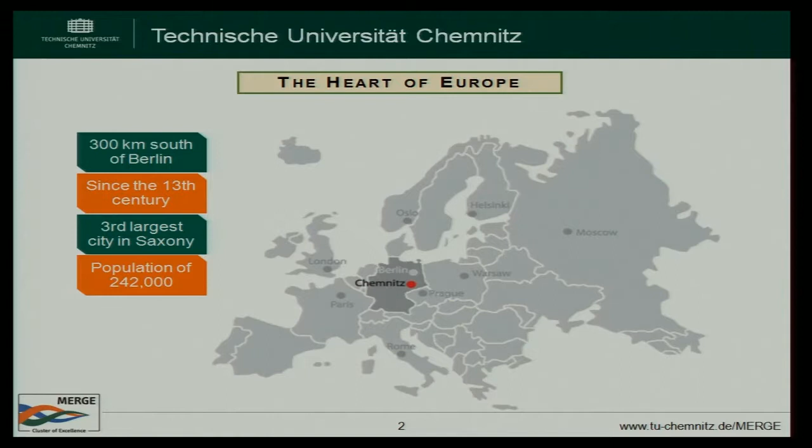In the university we have excellent research in a lot of topics, but especially as it is a technical university, we are focused on the faculties of mechanical engineering, electrical engineering, and natural science. These faculties, with some others like mathematics and economics, all carry out the research in our cluster of excellence on merged technologies for multifunctional lightweight structures.

So this is a big issue. If you want to create lightweight structures, or fiber-reinforced plastics as one special case, it's an interdisciplinary subject. You cannot solve the problems alone as a normal mechanical engineer. You need a lot of other scientific input. You need engineers, you need mathematics for calculation, you need chemistry, especially polymer chemists for, let's say, optimizing of fiber-matrix adhesion, for example.

And so, to solve all this, you need a strong cooperation within the university, but also with cooperation partners, because for us at the university it's really important to have the feedback of industry, to know what they need, what is necessary to develop application parts for lightweight structures.

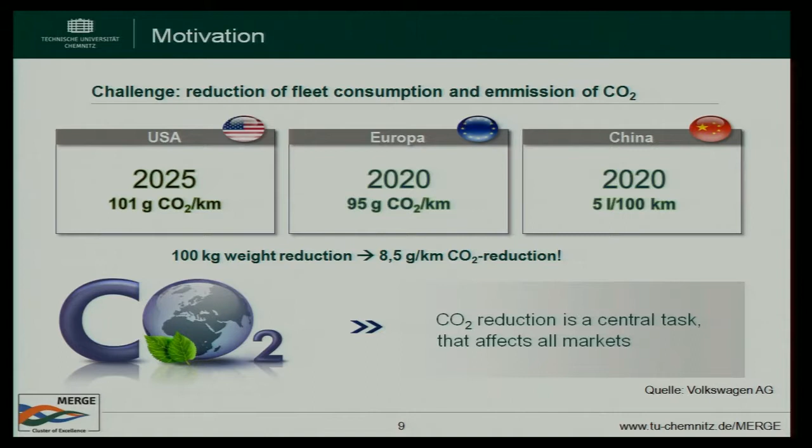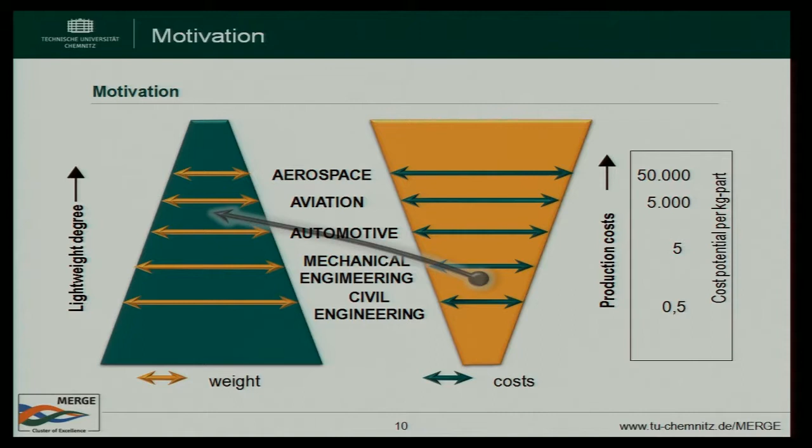And the problem is, making lightweight structures is state of the art for aerospace, for aircraft, for rockets, and so on. But this is really expensive. No one wants to pay $1 million for a car. So for mass production, you need technologies which enable this lightweight construction, and therefore you cannot use classical production technologies for making high-performance fiber reinforced plastics like hand lamination or resin transfer molding to make thermoset-based carbon fiber reinforced parts.

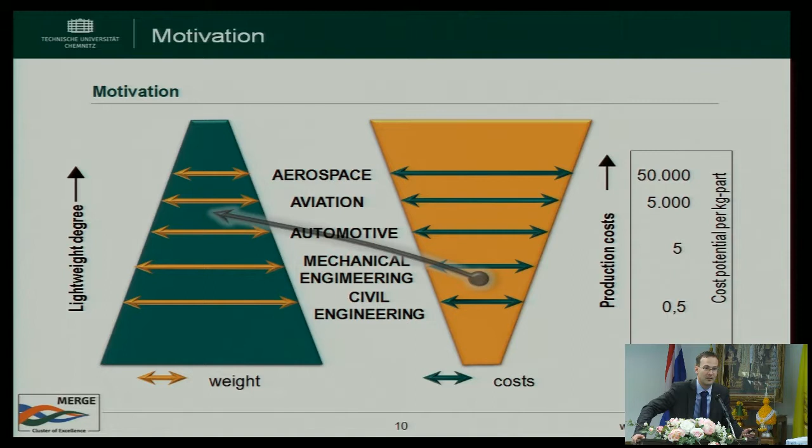You need technologies especially for thermoplastics like injection molding, press molding, technologies which are suitable for mass production, to produce more or less 1,000 cars per day, which is, for example, a typical production rate for big automobile producers like Toyota or Volkswagen and so on. So this is one aim we also have in the cluster.

On the one side, we want to reduce the weight of the structures, so we are efficient during the lifetime, but we also need efficient technologies for producing these lightweight structures. So we have to look at two major goals: during lifetime, reduction of emission, to be more efficient. This is something natural if you have lightweight structures, and on the other side we need efficient technologies.

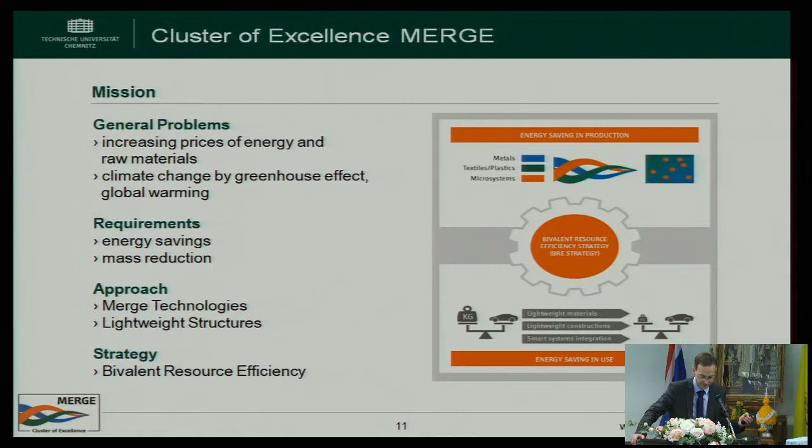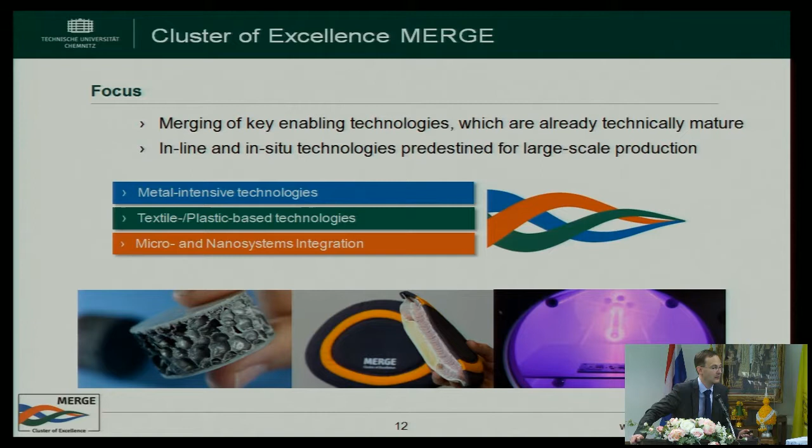So what we are looking at especially is using metal intensive technologies which are based on state-of-the-art technology, like sheet forming, die casting, or for example high pressure forming. And we are looking at textile plastic based technologies, so this is typical fiber reinforced plastics technologies, injection molding for example, and also looking at the integration of micro nano systems in the structures.

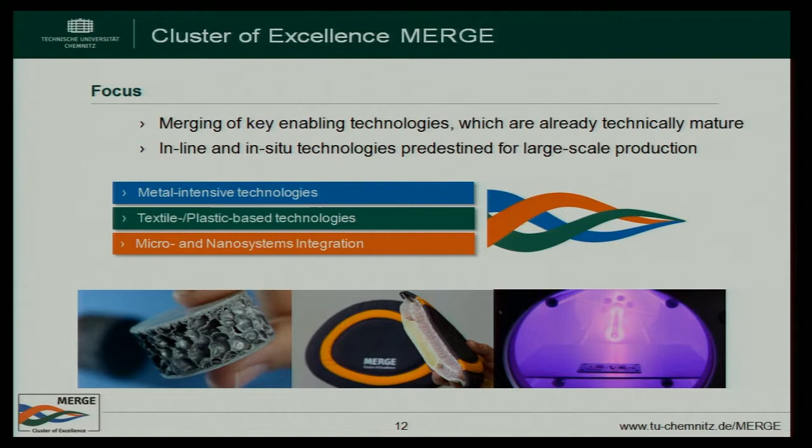So today the world is getting smarter. It means all your structures, not only in cars but also applications in civil engineering, medicine. You integrate sensors, sometimes also already actuators in the structures, and therefore if you integrate it with technologies efficiently in the parts, you also can save material. You can be lighter because you don't need additional fasteners for mounting it, and it can be efficient because you don't need additional processing steps. So all these three we are looking at to reach the goal of making lightweight structures.

And from the technology view, we are looking at technologies in making semi-finished products, prepregs, in technologies which are roll-to-roll, meaning continuous working technologies coming from a roll like a textile. You make something continuous working, functionalization, fiber orientation, impregnation with the matrix, going again on a roll. So this is continuous working. It's not a sequence with some

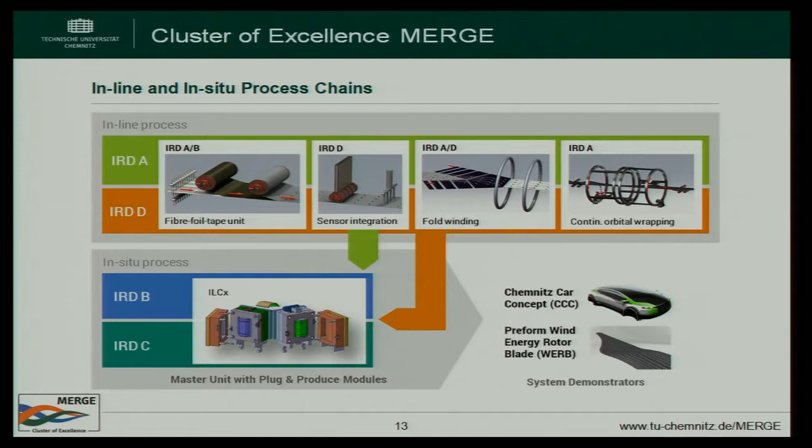stops between, and then try to go into so-called in situ processes, in mold processes, which means you have a mold where you bring all your components together, and you can use this mold for many parts. Close it, make a part, open it, demold, close it, make a part, open it, demold, and so on, with short cycle times, something between 1 minute, 2 minutes, but not longer.

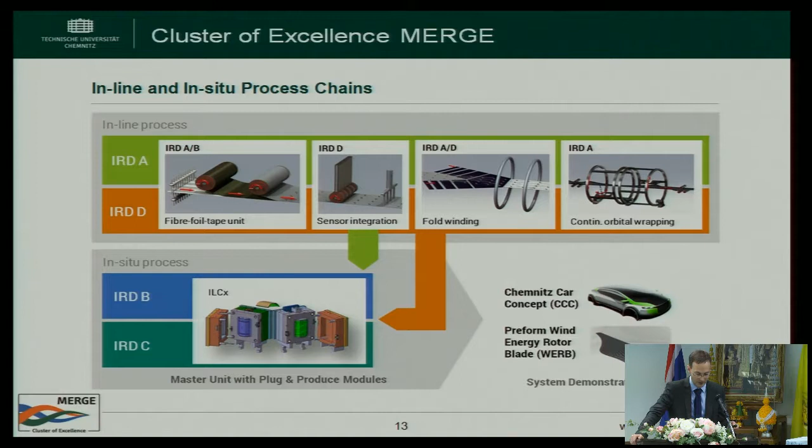Okay, so to start, how to get something like this solved? We are starting with some basics, how we came from the specifications we get from the industry. You have some supplier who makes some parts for an automotive company, and he wants to reduce the weight of some parts because he gets these conditions from the automobile company. Normally, some of the automobile companies say, okay, our next generation car must be 200 kilograms lighter in total, and this you have to go to every development area. Under the hood, interior, exterior, everywhere you have to reduce a percentage of weight to reach this total amount of, let's say, 200 kilograms for the next generation car.

And so you get some boundary conditions, and how to solve this problem. You have to look at the specifications you need, at the design, how to design something with fiber reinforced plastics, and then go from this design to making the mold and making the technology. And this we want to look at in the next, let's say, 1 hour. I have to look a little bit at the timetable. So we have some time to go step by step, and for example, I have a part with me where we can look how to develop it step by step.

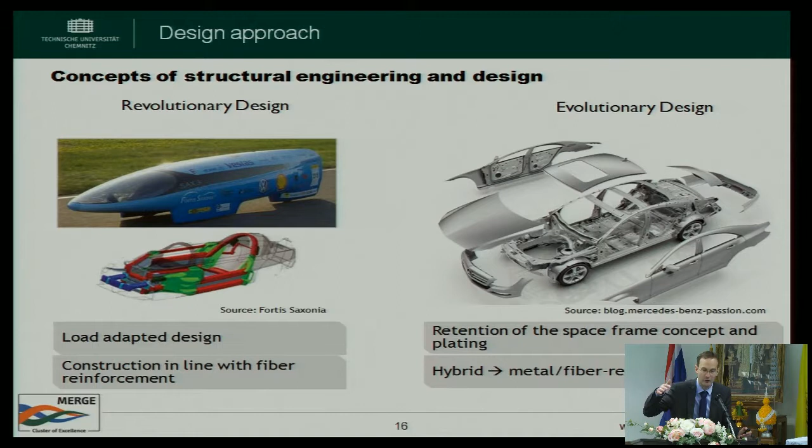So in the revolutionary design, you have the possibility to make some topology optimized construction, a construction with, let's say, stiffeners, ribs, profiles made from carbon fiber reinforced plastics. The load transfer is only here, so you really have material only where you need it. And it's fiber-friendly load transfer, so the load goes only in fiber direction.

In the evolutionary design, as you can see here, for example, with such a pillar for the roof reinforcement, you change single components and make them, let's say, from fibers at the end. For the assembly, you have some steel parts, and you have to assemble it with the normal steel car body.

And you step by step change some parts, and then you need, of course, assembly technologies, fasteners or gluing or welding, something like this, where you can join the fiber-reinforced plastic parts with the normal steel. So that's not so easy, especially if you use carbon fibers. You have problems with corrosion if you have direct contact between carbon fibers and, let's say, steel or aluminum.

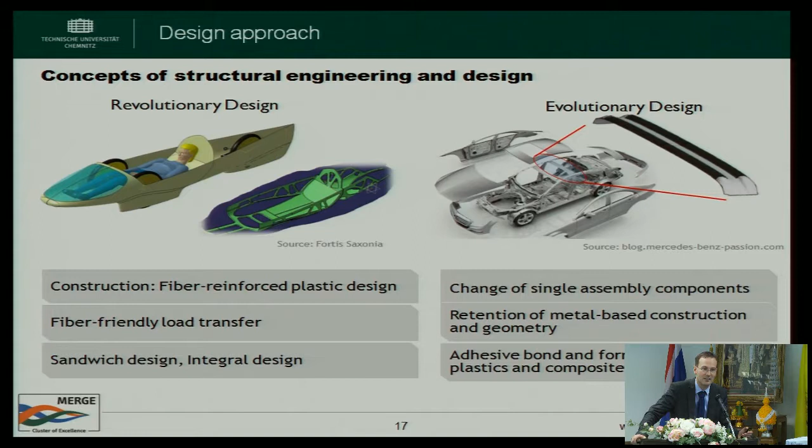So you have to look at quite interesting joining techniques. Sascha Müller, for example, will discuss some joining techniques later on, how to solve such problems.

Now, the next is the design approach, how to reach lightweight design. You have more or less 3 major topics to reduce the weight. The first, I think the easiest to understand, is using lightweight materials. Per definition, lightweight is something with a density below, let's say, 5 grams per cubic centimeter. So per definition, aluminum is a lightweight material, titanium is a lightweight material, magnesium is a lightweight material, but also, of course, plastics and fiber-reinforced plastics.

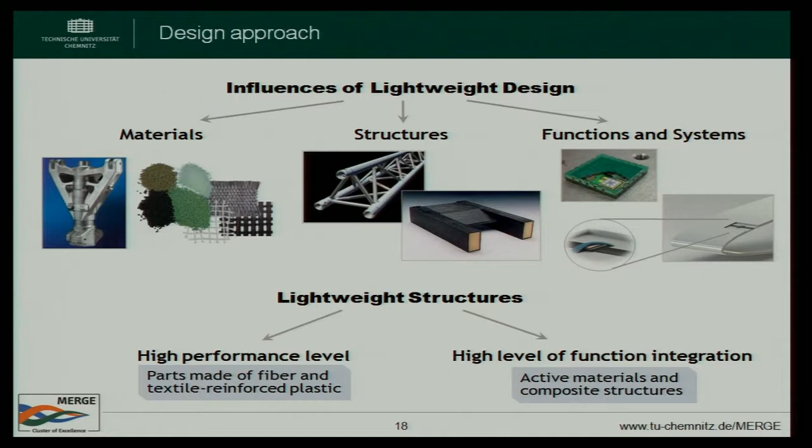Because the density is below 5 grams per cubic centimeter. With normal plastics we are around 1, depending on whether it floats on water or not, so this is easy to check. A glass fiber has a density of, let's say, 2.7, so in combination with plastics we are at a density of, let's say, 1.4, 1.5 grams per cubic centimeter. So this is something easy to understand.

But of course, you can also make lightweight design with a steel construction, let's say a bridge construction. Steel with a density of 7 is not a lightweight material, but with the construction, for example rib structures or sandwich structures, you can reach lightweight design, you can reduce the weight only with the design.

So, for example, Dr. Sandra Gelbrich will speak tomorrow also on fiber-reinforced concrete. So this is something you can also construct with concrete in a lightweight design. So this is the topic of construction.

And last but not least, you can reach lightweight design by integrating functions into one part which you made before with separate parts, for example, having some kinematics. You have some fiber-reinforced plastic, and you want, for example, a seat in a car that moves in height or for your back to reach some position.

You can reach it with some additional mounting parts like an electric motor, you need some electric devices, but with some tricky design of fiber-reinforced plastics, you can reach this goal also without an electricity part, without a motor, without an electric drive, and so you can reduce the weight. Because in all electric applications you have copper, which is really heavy material, you have steel inside, so you can reduce the weight. Also, if you have some sensors integrated, you can avoid some devices for switch on, switch off. You can reduce also the weight and so on.

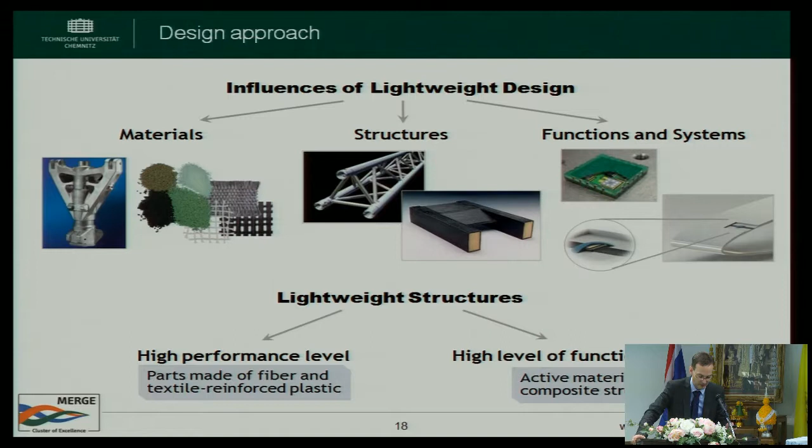So on this we are looking at materials, structures and integration of function and systems to reach a lightweight design. And for today in all the system, we are concentrating at the moment on lightweight materials, on fiber-reinforced plastics, for the next 2 days.

Having this in mind, lightweight is not only made with fiber reinforced plastics, it's a quite interesting part, but you also can deal with lightweight metals and so on. And in this combination, together with lightweight structures, we call it lightweight systems. There we can really reach a goal of reduced weight, let's say 20-30%, using lightweight materials, and with a really tough and smart design to get lightweight also in the application.

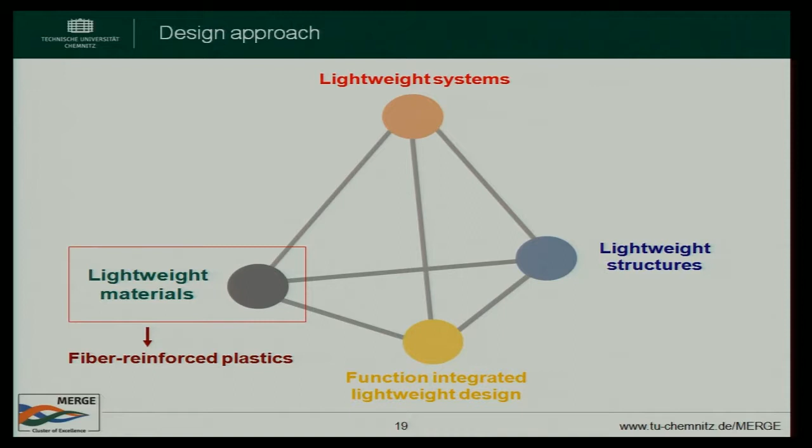Now, lightweight, to reduce the weight, this is not something you can get cheap. It needs some efforts in using materials, new technologies, and also, of course, in engineering costs. Because, well, design with metal, it's also tricky, but it's even more tricky to engineer fiber reinforced plastics, because the material behavior is not isotropic, it's anisotropic. So you have different material properties in different directions because of the fiber orientation.

Of course, when you can save weight, more or less you can also reduce your raw material cost if you don't need so much material, but your specific material costs will rapidly increase because carbon fibers are much more expensive, let's say, compared to steel. So in total, also your manufacturing costs will increase because you need new technologies. Total costs will rapidly increase when you want to increase the lightweight degree.

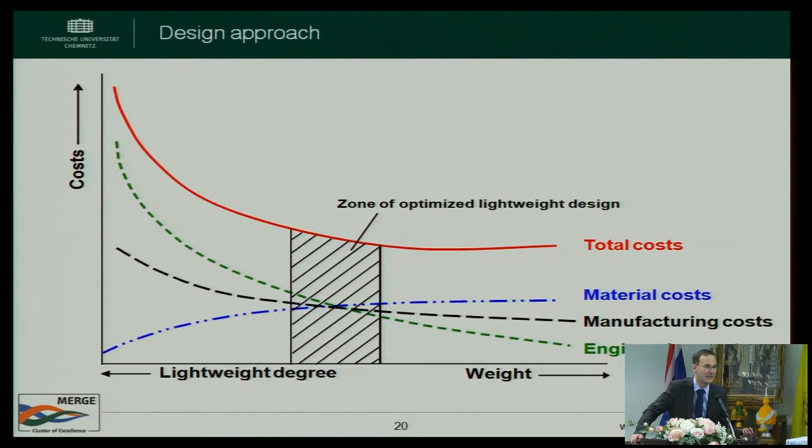So designing something which has to fly, like aircrafts or rockets, it's really expensive. For mass application, no one wants to pay so much money for a car. It doesn't have to fly, it only has to go on the street. You want to reduce the emission. So you need some optimized zone of lightweight design where you optimize all your influences which affect your total costs, not to make such a huge lightweight degree which needs a lot of engineering time, and engineering means personnel costs especially. You need something where you have an optimization of all this.

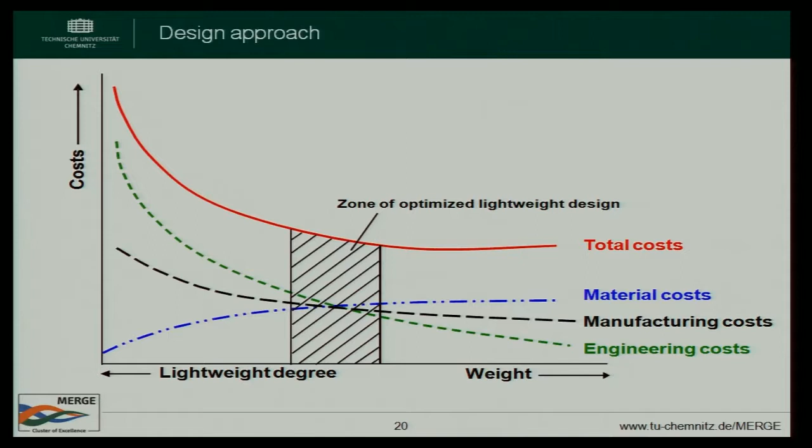So you always have to look at how much weight you can save, but how much your production costs will increase, and therefore not only production costs, but in application, your part costs, which you have to sell. And no one will only buy a car because it's light, with the green thinking, but have to pay 5 times more than a normal car. So no one is so idealistic, only for green thinking to reduce the weight, to pay so much money for a car.

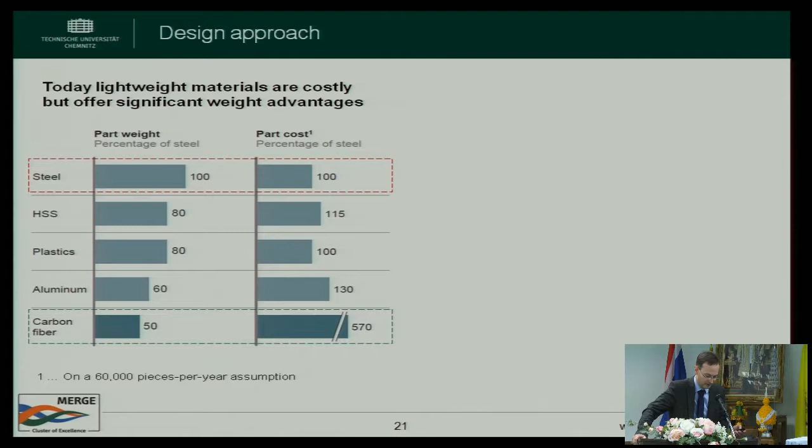So this is the problem we have. And to solve this, you have to look at many things. Of course, we need much more cost reduction in the carbon fibers, but also in the production costs. And this is something, a problem of, let's say, we call it the problem between chicken and egg, because carbon fibers are expensive.

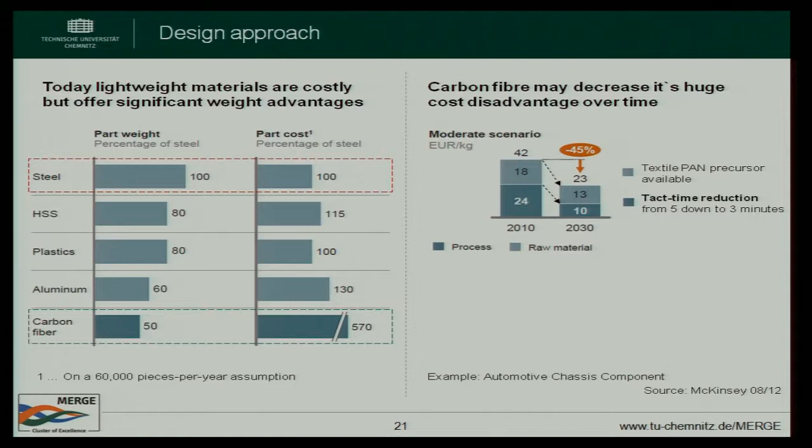Because they are so expensive, no one buys them. More or less, only producers of aircraft like Boeing and Airbus buy all these fibers, and so the market is not so big, and therefore you cannot reduce the price of different carbon fibers. If more people would buy carbon fibers, you would have a reduction of the carbon fiber cost, because you are more efficient. You can produce more with bigger amount, with bigger technical devices, but this is a problem. Selling the fibers, as more you can sell, as cheaper you get the fibers, but they are still too expensive, so the automobile production don't want to buy it.

So this is something the market slightly increases with producing of fibers, and so the carbon fiber price only slightly decreases. So we have to wait to make more developments, efficient developments in fiber reinforced plastics, and therefore we can get more application for fiber reinforced plastics. The producers of carbon fibers can reduce the price, and so it will be much more increase.

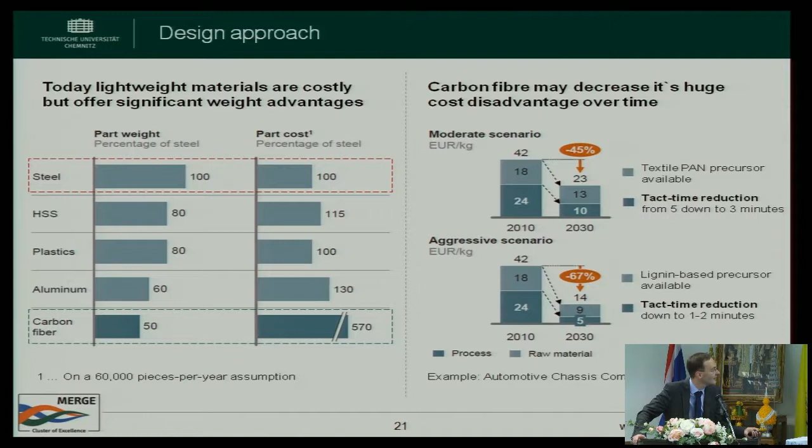And so these are some foresight studies. So at the market, we have, let's say, 3 to 4 or 5 global producers of carbon fibers, and they are sharing the market. And there are some foresight studies how the price for carbon fibers will reduce in the next years, but it depends on the application. As more application we have, as more the price for carbon fibers can reduce.

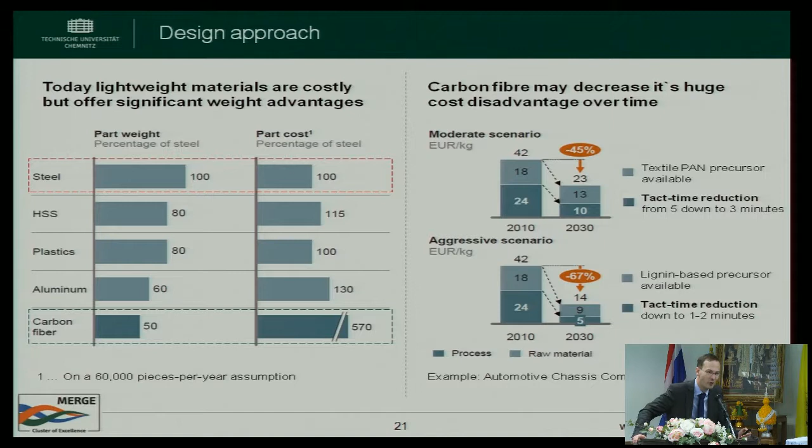It will not be never so cheap like glass fibers, because it comes from the precursor. It means the basic material you need for carbon fibers. But of course, we have some foresights that it will be reduced, let's say, up to 50% in the next, almost 15 to 20 years.

Okay, so this for the introduction. Now I want to show one part where we want to go step by step through how we come to the fiber reinforced plastic part.

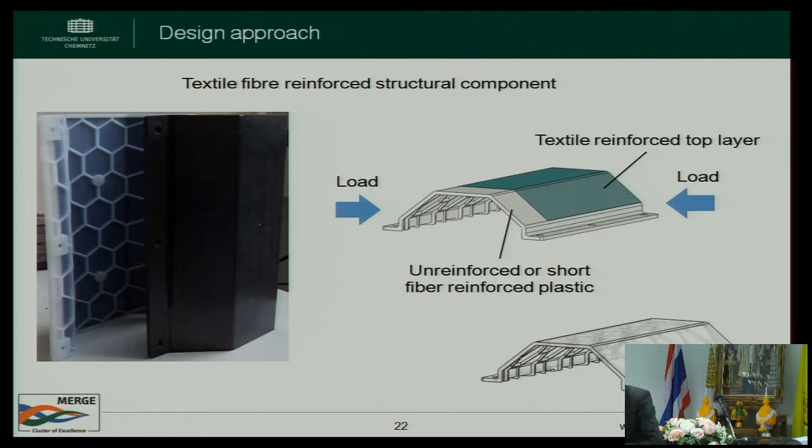Okay, so this is, let's say, a typical demonstrator we are making the research on. It's at the moment a normal plastic part. It's an injection molded part without any fibers inside. Injection molded, you have the gates for the plastic melt here. We have some honeycomb stiffener structure behind, and step by step, Isabel can show me.

Step by step, we want to integrate some textile reinforcement in, so that we at the end reach this, the textile fiber reinforced part. So this is something, let's say, one customer wants to have, and so we go through step by step how to reach this.

Okay, at the first step, I will give you the poor plastic part that you see how it is. As you can see on the right side, this is our part. Now let's say it's some roof element, whatever. It's a demonstrator for us for the technologies.

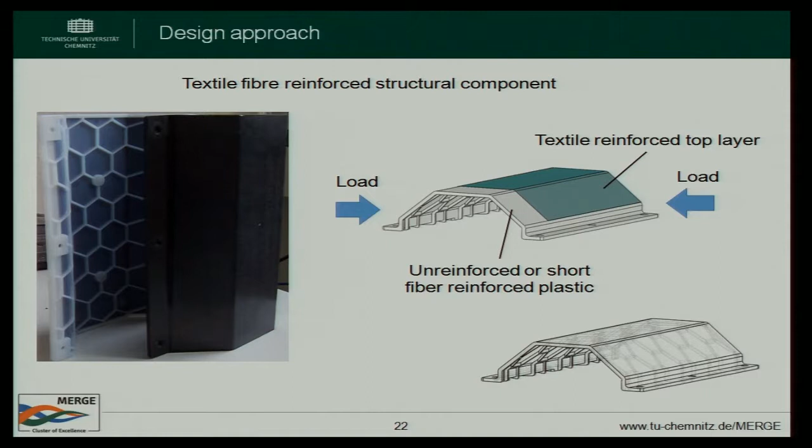First, as I mentioned already, fibers for the reinforcement have a reinforcement effect only in fiber direction. So it's not an isotropic material, it's an anisotropic material.

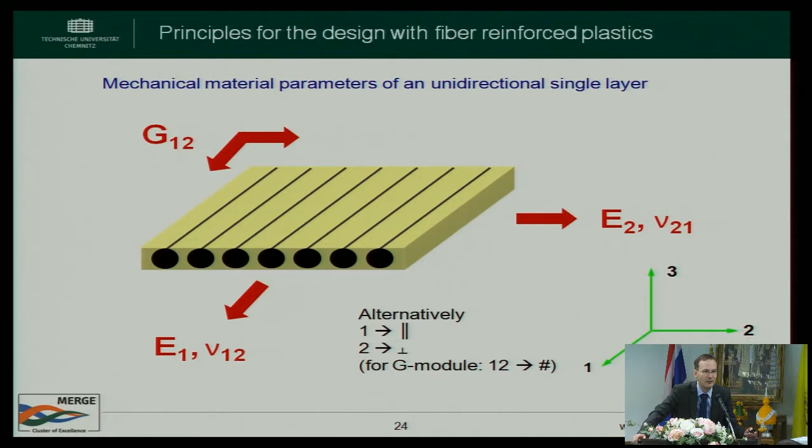And as we know from steel, we have one tensile modulus, one shear modulus, and depending on the kind of steel, we have different strengths, but in all directions, the same strength. So typical for steel, we have only one tensile modulus. Tensile modulus for steel, all should more or less know, we have 210 gigapascal tensile modulus. For the strength, it depends on the sort of steel, let's say 350 MPa for normal stainless steel, can be higher, up to 1000 megapascal for high strength steels.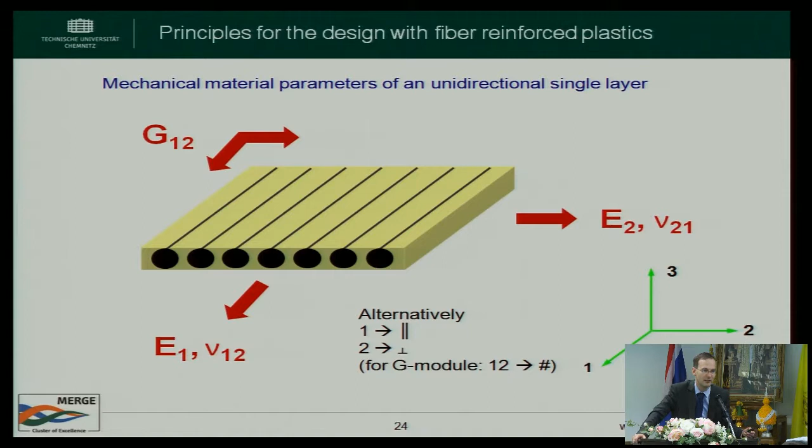But that's it. Now, for our fiber reinforced plastics, as you can see here, let's say we have some, which is black, made here, the fibers, single carbon fibers embedded in some yellow matrix. We have one tensile modulus in fiber direction, another tensile modulus perpendicular to fiber direction, and here we have one shear modulus. Also we have two different Poisson ratios. Nothing, I want to go too much in details, but especially tensile modulus in fiber direction and tensile modulus perpendicular to fiber direction is totally different. And this is only for calculation.

It's clear if you have a carbon fiber with a really high tensile modulus, it's really stiff, and we have some weak matrix, like polypropylene, with a really, really low stiffness. This is like a parallel connection of a stiff spring and a weak spring.

If you give some force on it, some load, the stiff fiber will take all the load, and the weak matrix will go with it. So we have the same elongation, but the sharing of the force is totally different. The stiff fiber will take more or less all of the load, the weak matrix not so much.

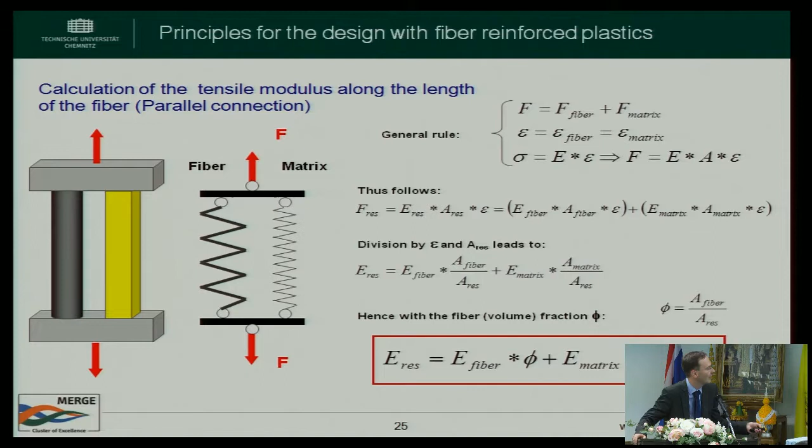Therefore your calculation of the total resulting stiffness, the tensile modulus, is related to the tensile modulus of the fiber and the fiber content. If you have no fibers inside, the tensile modulus will be that of the matrix. If you have more or less only fibers, the tensile modulus will be the tensile modulus of the fibers.

Now, if you look at the composite fiber reinforced plastic perpendicular to the fiber, it's something like a series connection of a stiff spring of the fiber and the matrix. And so the load is more or less the same going through all, so the matrix has to take the same load as the fiber.

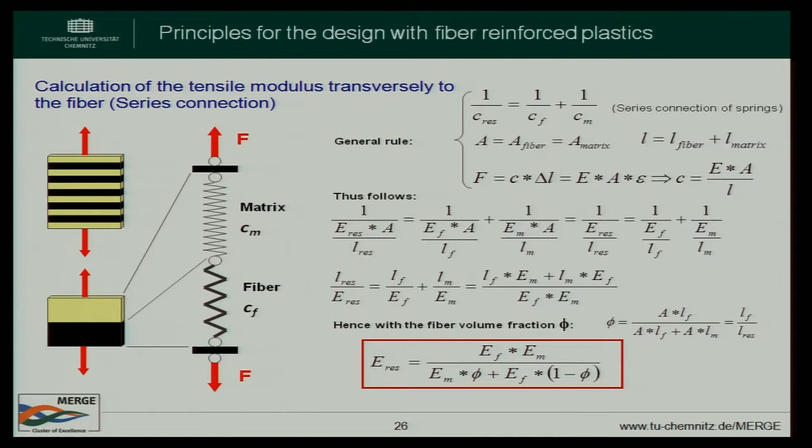I think you can imagine that there's a big difference if you have a load in fiber direction or perpendicular to it. So the resulting tensile modulus is totally different in the calculation compared to the tensile modulus of the fiber reinforced plastics in fiber direction.

As an example, you see it here - this is a typical carbon fiber reinforced composite material, all fibers in one direction, a so-called unidirectional layer. You have here all the material parameters you need. You see how many there are compared to steel. For steel you have one tensile modulus, one shear modulus, more or less one strength, and one Poisson ratio. Here, let's say this is a typical composite made from epoxy thermoset matrix, carbon fiber with a fiber volume ratio of 60%.

Now you see the tensile modulus in fiber direction and perpendicular - this is a huge difference. You have more or less no stiffness perpendicular to the fibers, but a huge stiffness in fiber direction.

So designing with fiber reinforced plastics depends - you have a lot of variations where you can adapt your specifications from the material to the load. First is the fiber volume content, which fiber you use, which matrix you are using, and then you have all these resulting different properties. This makes it so difficult in engineering - calculation and design with fiber reinforced plastics is much more complicated than design with classical steel.

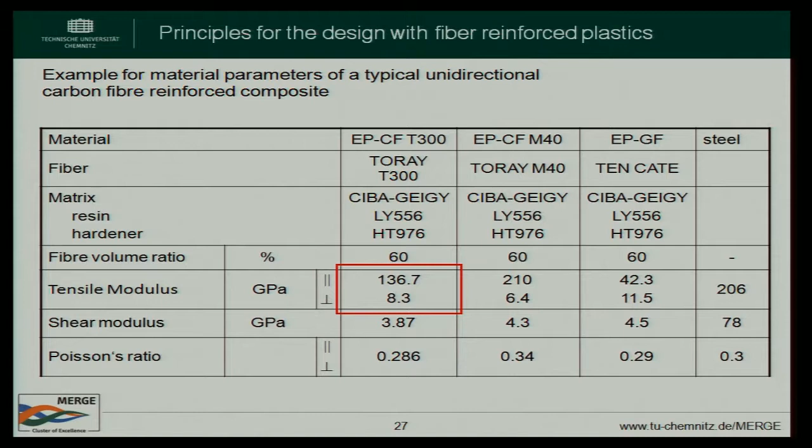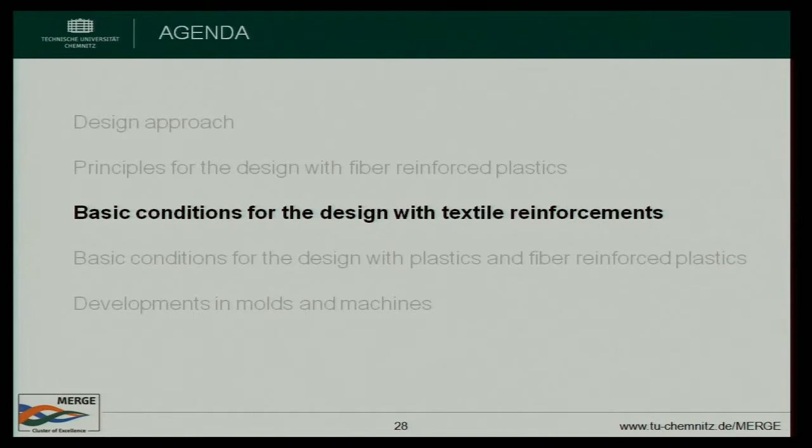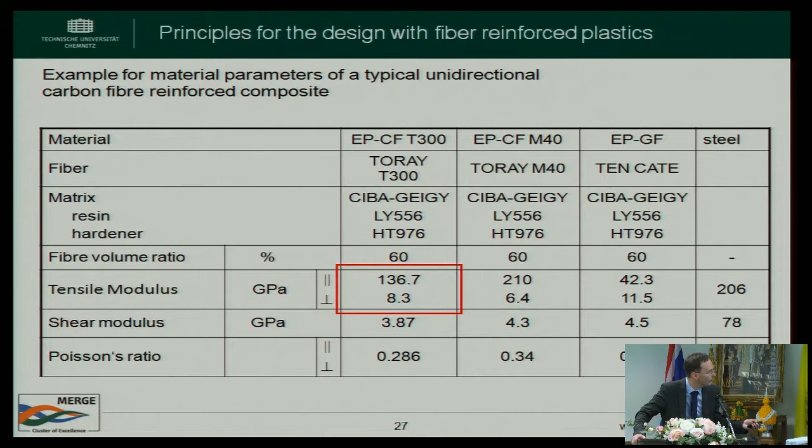Now, if you have a single fiber, that's quite nice to have, but with a single fiber you cannot make any part. First you have some boundary conditions. Let's say we have the part I showed before, and we know we want to integrate some reinforcements inside. You cannot take a single fiber, as a single fiber has a diameter of, let's say, 14 micrometers - you cannot handle a single fiber.

You always have to make some textile fabric from the fibers. So your boundary conditions for the part, especially for the reinforcement effect, depend on the design of your textile, because with the design of your textile fabric you can adapt your fiber volume content, your fiber orientation, your thickness of your laminate, and so on. But you always have to keep in mind the reinforcement effect is only in fiber direction, not perpendicular to it.

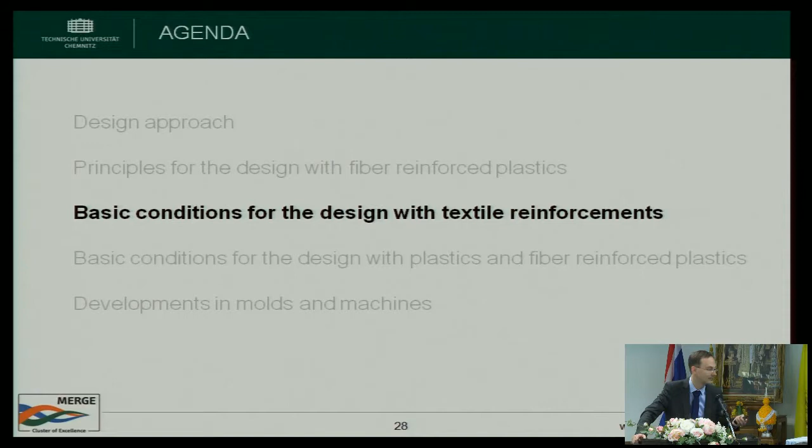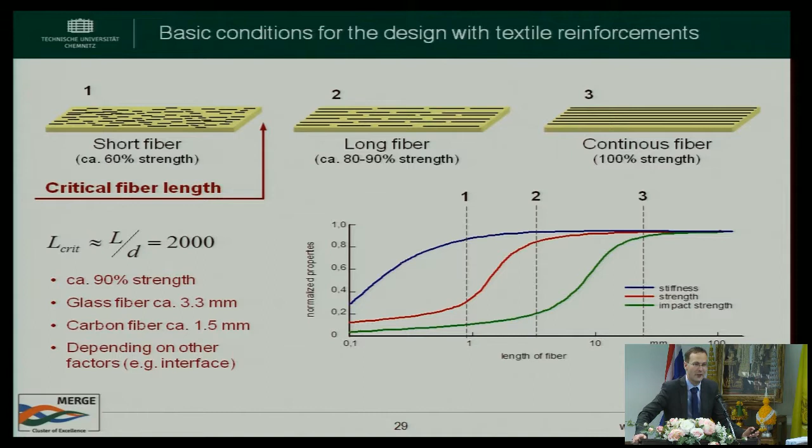First you have to look at what are the loads you want to apply on your part, and which fiber length you need. It's easier to make, let's say, a thermoplastic process with short fibers instead of endless fibers. So you have to look if it is necessary to use endless fibers, long fibers, or maybe it's already sufficient to use short fibers.

Because in a part, you can see here, your properties of course depend on your fiber volume content, but also on your fiber length.

But this is related to which of your mechanical properties you are focused on. Especially the stiffness, which means the tensile modulus, already reaches a good level with short fibers. So if you only want to increase the stiffness of your part, sometimes it's not necessary to have long fibers. Sometimes it's totally sufficient to use short fibers.

This depends on your so-called critical fiber length. The length of the fiber divided by the diameter of the fiber should be something around 1,000, 2,000, 3,000. This is totally sufficient for the fiber length in a part, if you look especially at the stiffness.

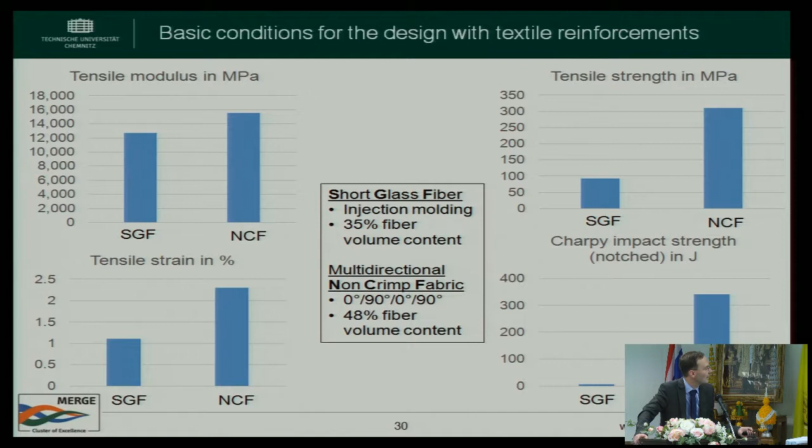When we look at the tensile strength, there's a bigger difference, you see it here, something between 30-35% compared to the non-crimp fabric. The tensile strain also increases, but the biggest difference you see in the impact properties. Because with short fibers, in a crash the fibers will be pulled out of the matrix. It depends also on your fiber-matrix adhesion. But the longer the fibers, the more energy absorption you have from friction between fiber pull-out and matrix. With short fibers you reach only 1/20 of the properties compared to endless fibers.

So it depends on the boundary conditions you get from your customer, which properties you want to increase in the part. If you are focusing on stiffness, sometimes it makes sense to use only short fibers because it's an easier process for making the part. If you are looking at impact and strength, then it makes sense to use endless fibers, but for stiffness, short fibers may already be sufficient.

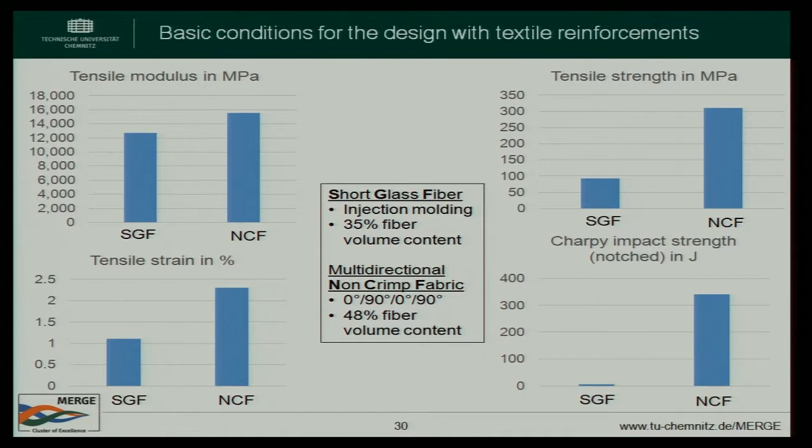So now, when you have decided what fibers you want to use, short fibers or endless fibers, you have a big problem. You have a huge variety of process routes to reach the goal. You have a fiber, you have a matrix, you want to reach a final part, and in between you have plenty of possibilities. You always have to look at which fibers, which textile process, which matrix, what combination you use.

For example, take a single fiber, you go to the roving. This is what you can normally buy from a fiber supplier, carbon fiber roving, with a typical tex. You can use the roving directly for fiber spraying, pultrusion, filament winding. You have to combine it with the matrix, and there are different ways. Normally, wet impregnation means you have your resin or a thermoplastic melt, you go directly over filament winding into impregnation, and you have your part.

But of course, you also can make it with the fiber going to a textile process. You make some textile fabric. Let's say you can go to weaving, you can go to laying process, make some non-crimped fabrics. You have your textile. Then additionally, you have to impregnate it. You have to combine this with the matrix. You have some different possibilities.

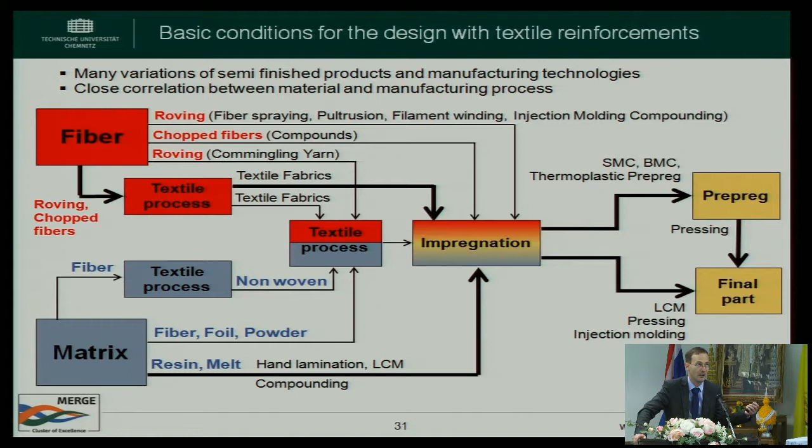This always depends on your geometry, on your matrix you want to use, on your technical investment you want to make, on the amount of parts you want to do. So keep in mind, there is no solution for all. There are a lot of solutions depending on the technology used for your final product. And you have to look on all this, not single. You cannot look on the geometry design independent of the technology, because not all geometries you can realize by all technologies. And so all this you have to look at together.

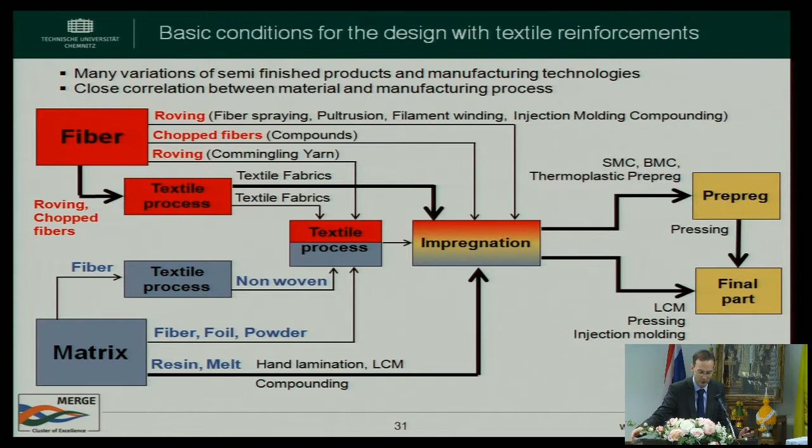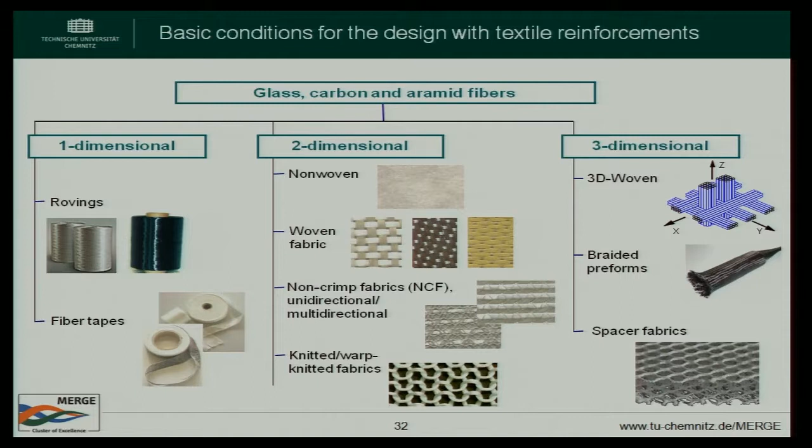Okay, so coming from the single fiber, going to one-dimensional textiles like rovings. This is what you buy normally from the supplier, carbon fiber rovings, glass fiber rovings. You can use them as they are for filament winding, for example, for making rotationally symmetric parts like vessels, tanks, and so on. Or even for open mold processes like fiber spraying, you have your roving. You go with a fiber spraying system, directly making some big parts like the housing of a swimming pool or the body of some boats. This is typical fiber spraying technology using rovings.

But normally you take the rovings, and this is something especially the producers of textile machines look at: how to make two-dimensional products which are suitable for the resulting part. So most common are woven fabrics, non-crimped fabrics, non-woven, but of course you also can make knitted, warp knitted fabrics, but this is something really specialized. You have to look on the application. And not so often three-dimensional, like 3D woven, you can make braided preforms, or let's say spacer fabrics, like warp knitted spacer fabrics.

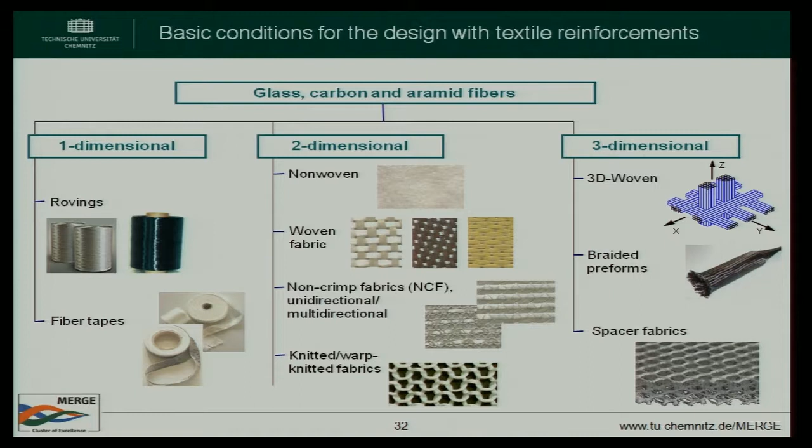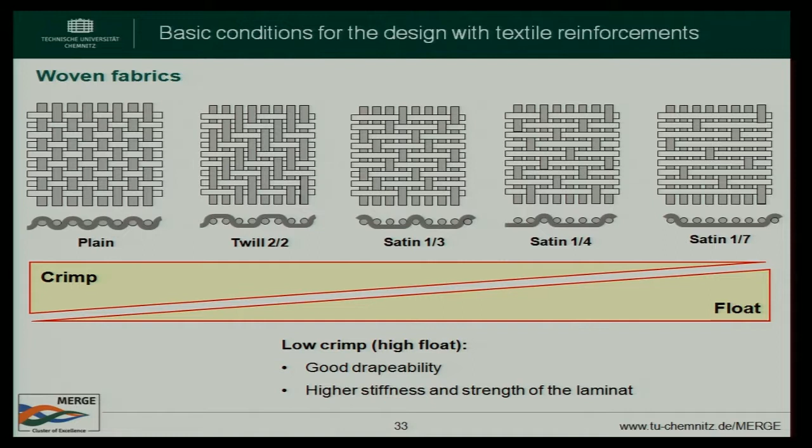So, from our point of view, what are the most important, we think, suitable for mass production of thermoplastic materials? Now, woven, I think it's clear. You have many varieties of weave style. The normal plain, as you can see here, you have a lot of crimp, meaning your fibers are not going in one direction because of the weaving process. You are going up and down, and always remember the basics, the fiber reinforcement effect is only in fiber direction. As you can see here, the fiber direction goes around, going down. So you don't have such an efficient use of the fibers, because your fiber direction is not only in plane, but also goes in thickness.

So woven fabrics are easy to handle, but because of the crimp, the stiffness of the laminate is not as good as if you have unidirectional fibers. The higher your float is, the better is also your drapability. So if you have huge, complex geometries and your part is shaped, it's better to have a high float, not so big crimp, then it's easier to drape. Yeah?

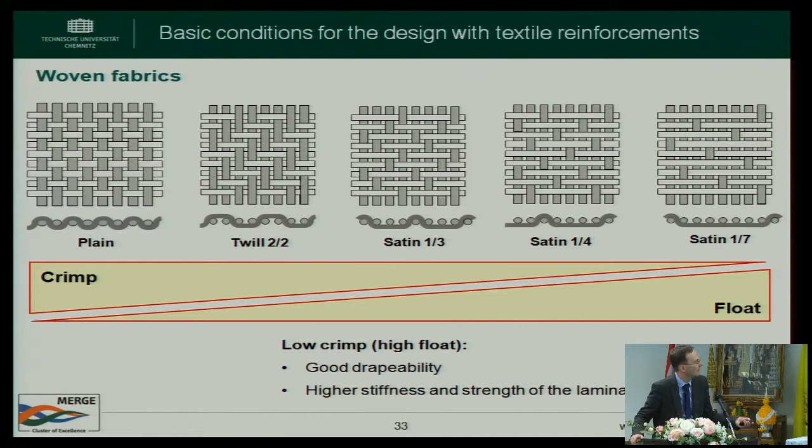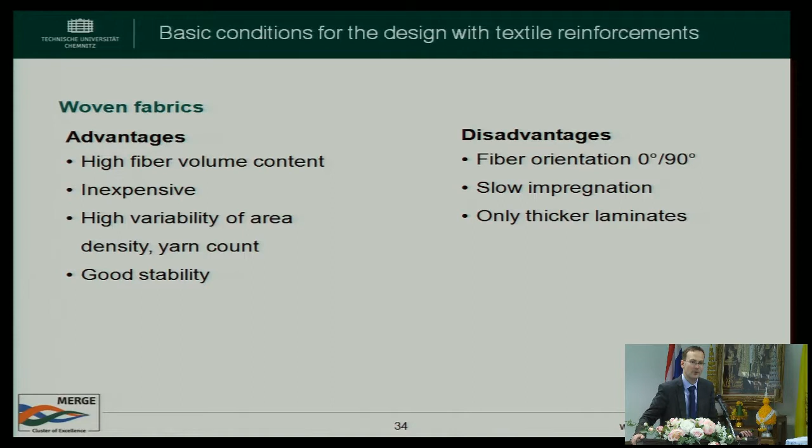Instead of this, you also can use non-crimp fabrics. So, for example, looking on woven fabrics, you can reach high fiber volume content. It's more or less inexpensive, has good stability, but you have not so good drapability, and your fiber orientation is restricted. Weaving more or less only works in fiber direction, so 0 degree and 90 degree. You cannot weave 15 degree, 30 degree, 60 degree. That's the problem. And as you have a high fiber volume content, it's not easy to impregnate with the matrix. You need your matrix inside of the fibers to reach this reinforcement effect.

Therefore, we prefer to use non-crimp fabrics, especially for thermoplastic applications. Why this is so, we will get to later, but with thermoplastic melts, impregnation is much more complicated because they don't flow so easily. Thermoplastic melts have really high viscosity, so the fluidity is really low compared to thermoset resins.

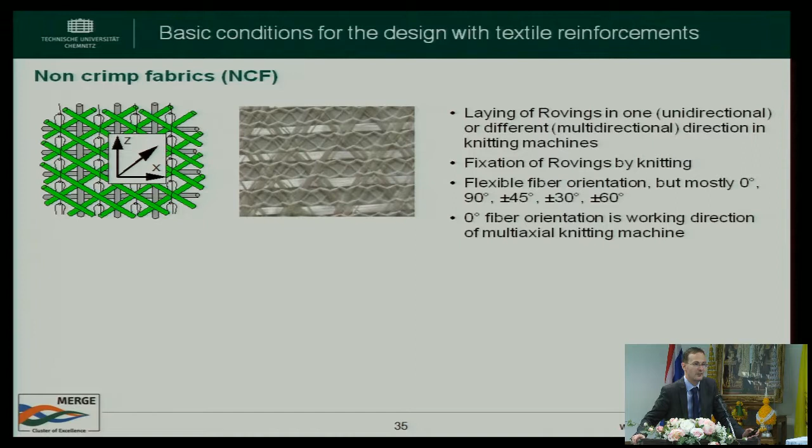And if you look on non-crimp fabrics, as you can see here, you can adapt your fiber volume content, and also you can adapt your fiber orientation. So it's easier for the laying process. You normally go on multi-axial machines.

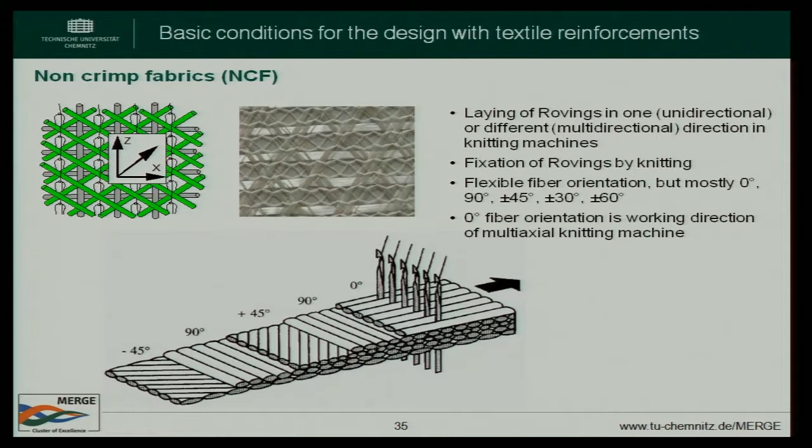You have some stitching process for fixation of your fiber rovings inside of the non-crimp fabric, and you can lay your rovings in different directions, and this is more efficient for producing load-adapted fiber reinforced plastic structures, because you can adapt your fiber orientation more on how the force flow is inside of the part instead of weaving, because in weaving you always have in the basic layer 0 degree and 90 degree.

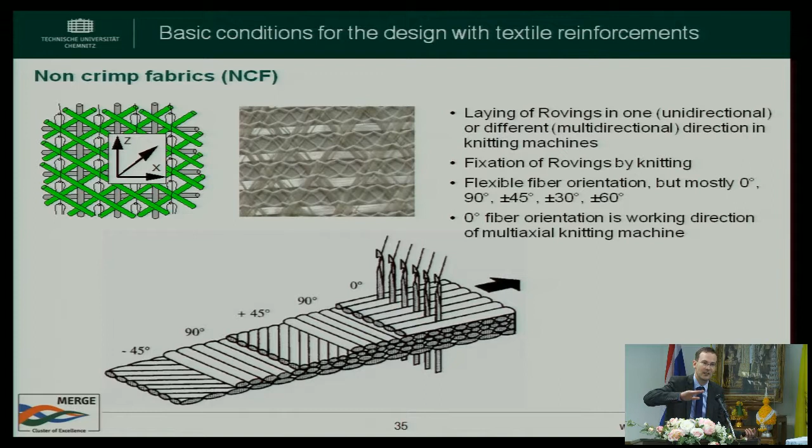So non-crimp fabrics from our view for thermoplastic application are much more interesting. They have a very good drape. You can highly align your fibers because you have no crimp like in weaving. So you are laying more or less aligned in fiber direction and in plane.

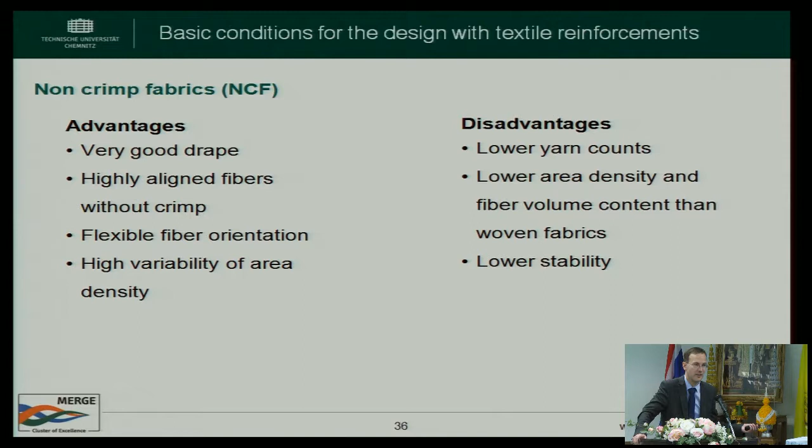You have much more flexible fiber orientation, and of course there is some disadvantage as you have more variety in the area of density. You cannot reach the yarn counts as in weaving. You are normally a little bit lower in the fiber volume content. But more or less, we have more advantages compared to weaving products than disadvantages.

So, summarizing: non-woven, knitted fabrics, non-crimps and woven fabrics. Stiffness and strength we reach already with non-crimp fabrics at a really good level, but the drape properties are much better compared to woven, and the cost and technological expenditure is much higher for woven.

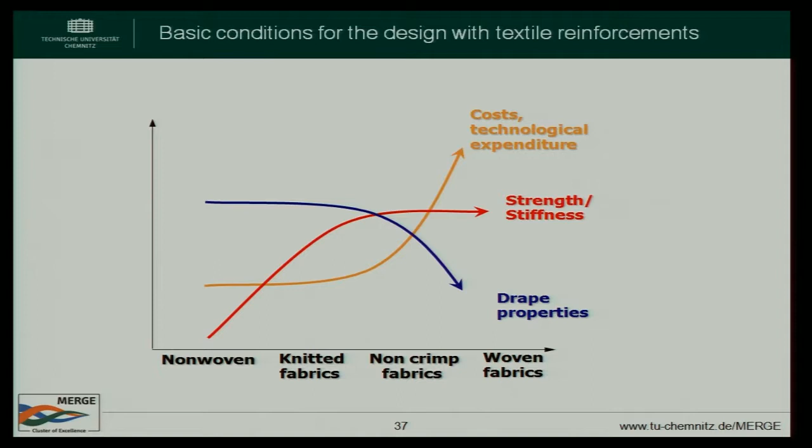Non-crimp fabrics, it starts already compared to non-woven. So non-woven is easy to make, but the fiber volume content and the fiber orientation are not such that it reaches a good strength and stiffness. Okay. So this is when we have looked on the textile. Till now, do we have some questions on textiles?

Maybe we can. What kind of fibers can be used for non-crimp fabric? Do you have limitations on that to use non-crimp techniques? For the fibers? For the fibers, yes. More or less no. Normally you can use glass fibers, carbon fibers, aramid, so Kevlar, aramid fibers. It's not a problem. Also natural fibers.

So normally you can say with all technical textile technologies like weaving, laying, you can use more or less all technical fibers. You have, of course, some small difference in some mechanical parts for guiding the fibers, because the friction is a little bit different compared to normal clothing like cotton fibers.

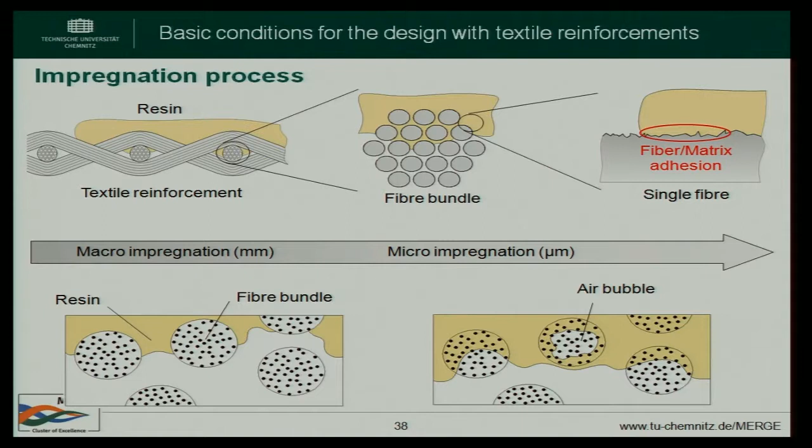And the only thing you really have to ensure is when you handle carbon fibers, as carbon fibers are electrically conductive, you have to ensure that they don't get access to your control unit. So this is a big problem using carbon fibers because of the electric conductivity. If you process carbon fibers, you get some fibers flying around, some small broken fibers.

They should not go on your control unit, because if you get some contact, you get some electrical error, and it's destroyed more or less. So this is something you have to ensure. Okay, thank you.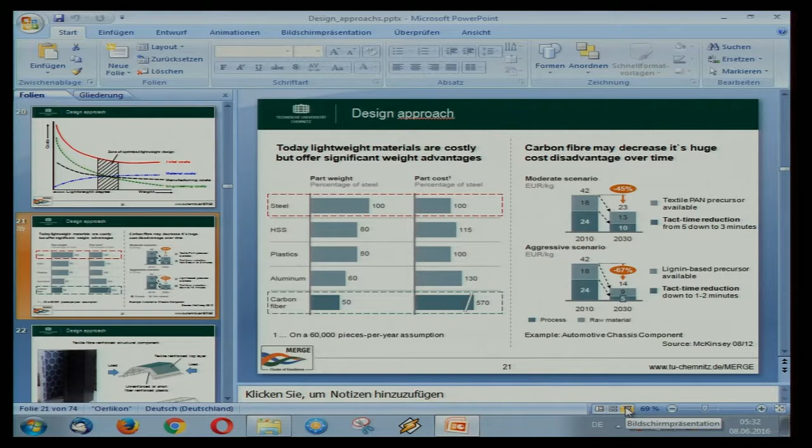In this case, the length of fiber is optimizing at, according to your comment, more than 10 millimeter. So in case we use short natural fibers, if we cut the length of the fiber, which one is the best one to use for the composites? This depends. You have to look also on the diameter and the properties of the fiber and also the fiber matrix adhesion. If you have a perfect adhesion between the fiber and the matrix, for example, the critical fiber length depends on the relation between stiffness and strength of the fiber, specifically related to the fiber diameter.

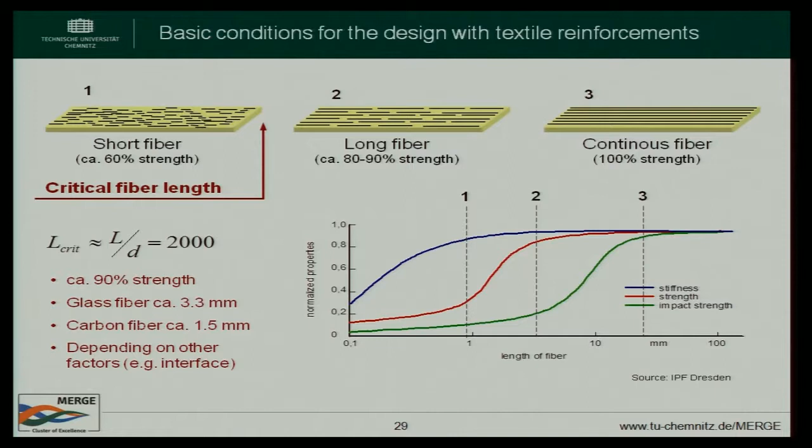But I will say, for example, for injection molding, it makes no sense to make it longer than, let's say, 20-30 millimeter. It will be shorter, when you're looking especially at the stiffness. For the strength, it might be longer, of course, especially for the load introduction. But this is something you have to test. It's easy to test: make some different fiber lengths of your fiber. If you cannot cut specifically, you should test it.

I read in some paper that the natural fiber length for making composites is 30 millimeter, the best one. So I think from this graph I can estimate your optimum strength will be after the number 3. It should be more than nearly 1,000 millimeter. Yeah, here it's in the logarithmic scale, as you can see. So there might be a publication on 30 millimeters for the hemp fiber.